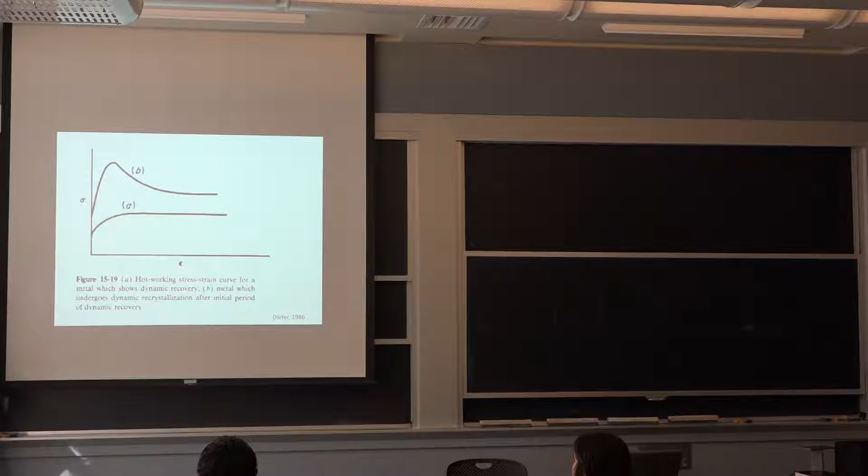And that's what happens on these curves here on stress to deform over the strain applied during a rolling operation. If you're at a certain temperature, you get to this level where there's always some grains that are being deformed, but there are others that are essentially recrystallizing. There's some that are growing, and it's just staying the way it is. We use that a lot when you see the videos I was showing when the steel is red. Essentially, that's what we're doing.

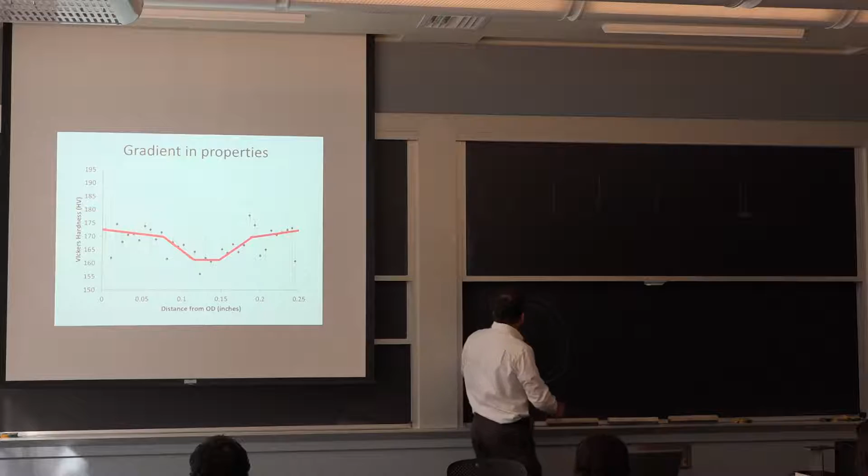Here's the pipe. It's got a certain wall thickness, and the axis here is from 0 to 0.25. That's what we're looking at. So we see that the hardness is higher on the surface. It goes to a minimum in the center, and it goes higher on the other side. So if we don't know anything about what happened, we can essentially hypothesize, say, hey, because it's harder here, as I form, I essentially bend the plate because this pipe came from a flat originally. It just essentially rolled and then seam welded here. So I have my weld in this area.

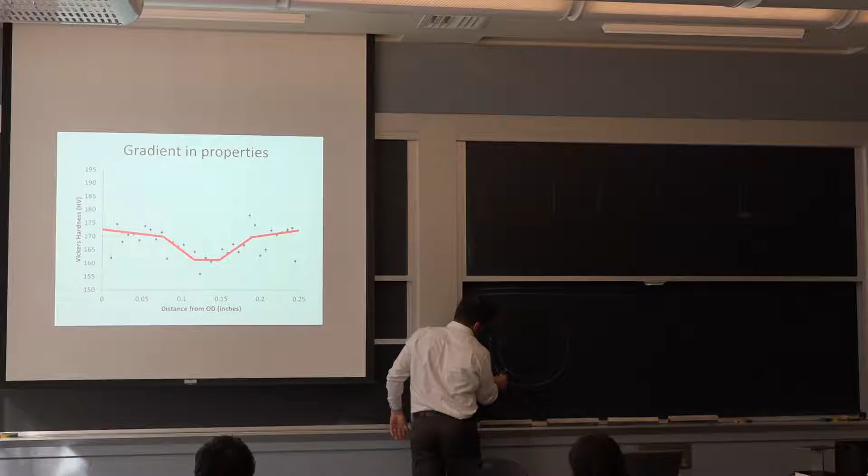And so right now we're not looking at the weld area, but we can see that when I'm forming this, I'm going to be stretching the material on the surface and compressing the material on the inside. Now, it turns out, according to this, that the effect is about symmetrical. So we're bending around the neutral axis. So it's a nice theory. So what we did recently is we tested it using finite element analysis.

So we had this product here. We did a tensile test on it. So we're getting our stress strain curve to break point. We used the part of the data that is before the necking, and that's what we input into this shape, deform it using laws of physics, of plasticity for metals, and here's what we got. So we got essentially the center core, only about 1/5 of the thickness, that remained only in the elastic region. So when you see blue, it means that you're below the yield point. And then everything above is above the yield point.

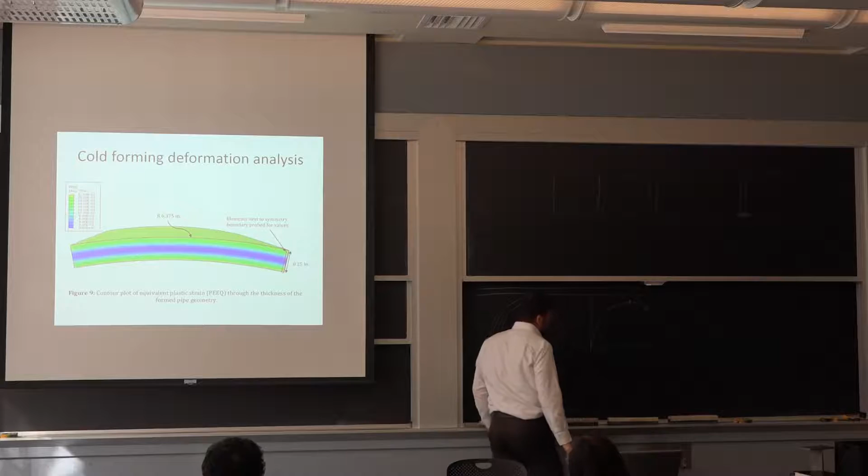If we go to our strain level here, 2.2%. So we only went about this far. So can that explain the hardness profiles? The answer is yes, because even if you only have 2.2% strain, essentially the stress strain curve of the material goes from about 46 KSI here all the way to a little bit above 60 KSI on the surface. Now, it turns out that we did run our test on the surface, and we were getting about 59. But it's a prototype; it's not exact.

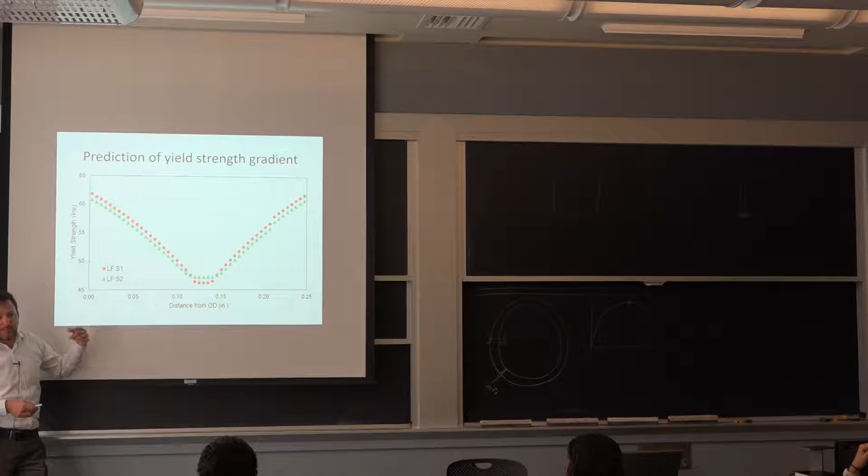So all of this makes sense: if we start with the flat, we get our cold working on the surface, nothing else happened, and the good news for us is we can translate a surface measurement into a mid-wall measurement just by using our finite element analysis, just as a parametric study. We won't do it every single time. We just arrive at a correlation equation and apply it.

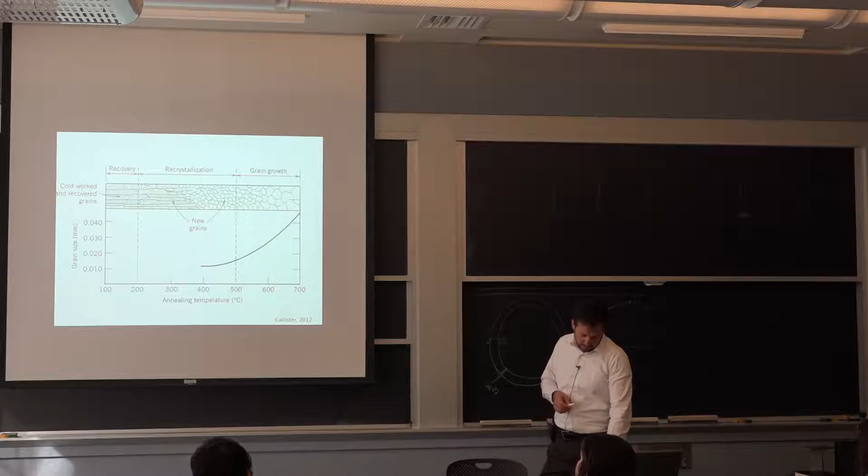Overall, it means it's a lot more difficult to take a surface measurement and go to the core. Because now you don't have just a strain, you have a different microstructure to deal with that's going to have a different hardening behavior and a lot of other characteristics. So these are different stress-strain curves. The other case we had was really the same stress-strain curve. We didn't know at all what we were going into, but when we realized it, we said, well, it's a good thing at least three people took that class.

Yes? Is there going to be a lot of residual stresses? That's a very good question. The residual stresses on this pipe will depend on exactly how you clamp it. If you clamp it and when you weld, you continue pushing, because you have your seam weld here, if you let it loose, it's going to be opening up a little bit. So you start from flat. If you didn't have the weld, you'd have a spring back, right?

So let's just draw it. I'm trying to get the two halves as close together as I can. If I did not have the weld, what's going to happen here is it's going to spring back on me and leave me a little opening. Is that what you were thinking? As you said, when you go from the surface to the middle, the middle is in the elastic region. Yes. So that's going to change, right? Because the plastic region will not go back to the original. Yeah. Okay. Maybe I was misunderstanding. So you're talking about a built-in stress in the product that may also influence the microstructure change.

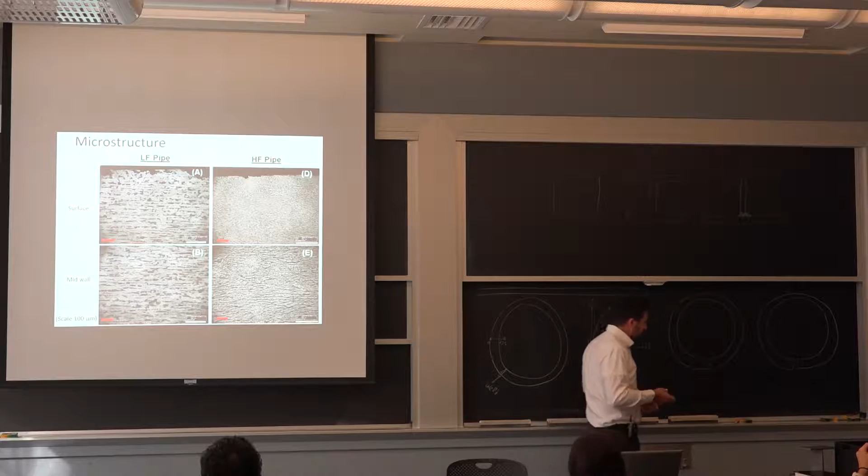It's not as big of a factor for the microstructure. If I stay very long at temperature in my annealing process, I can heal a lot of these residual stresses. We call it a stress relief treatment. Anywhere there were a lot of stresses between the surface and the core, because at temperature my yield strength goes down so much, I can just deform and get rid of a lot of the residual stresses. So that would happen on the second pipe, the one with a different microstructure. If you cut it up, it's going to stay where it was. The pipe that was cold worked and welded, if you cut it up, it's going to open up on you a little bit.

And part of that is because of that stress gradient. So what you're going after is there's a little bit of a tension compression zone in the center. And those are really there and true. But typically, it's not taken into account in steel design. And the reason is, say I have a little bit of a tension here on the surface. I'm almost close to yielding on the surface, which happens if you have a weld, for example. So be it, I will deform.

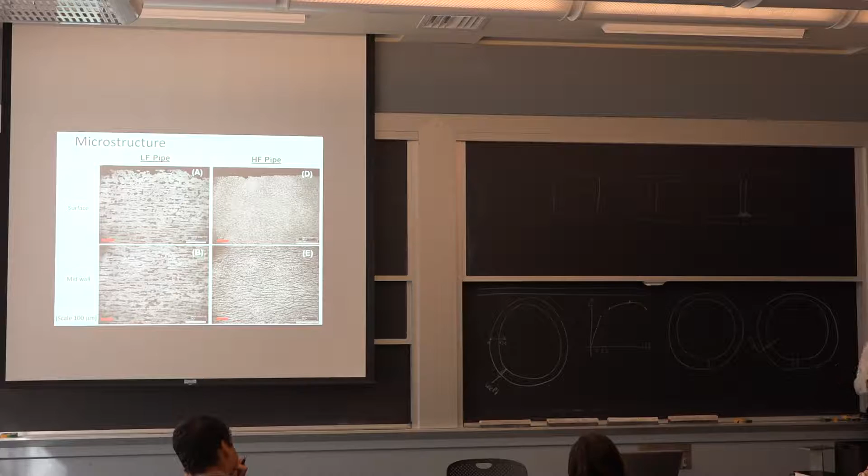We are a lot of times relying on steel being very deformable and not creating a problem in terms of a fracture. So if we had a very brittle material, all these considerations about exactly what the stress level through the thickness would be will matter. But because we're saying if one spot here reaches yield, that's fine, because the overall behavior of the wall is going to remain elastic or approximately elastic, and therefore I don't grow the diameter of the pipe. So people are more concerned about growing the diameter than having one zone reaching some plasticity.

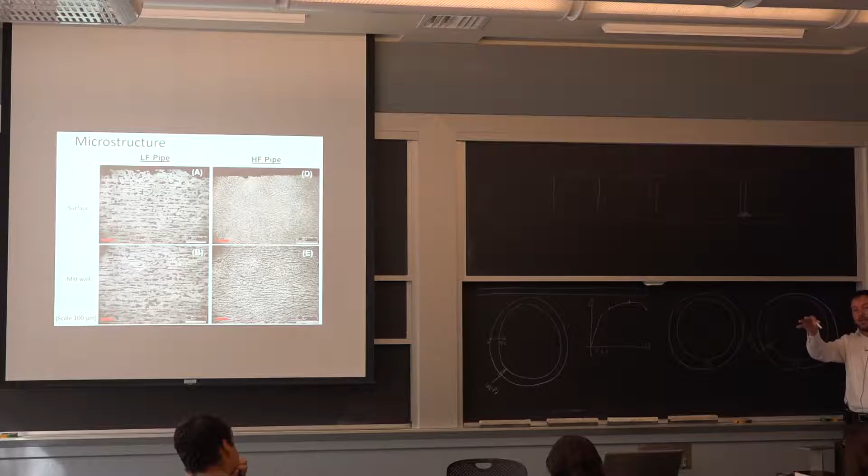It's a good question. Gets me a little bit deeper than I thought. But the stress relieving, by the way, is done on forgings. It's even done if you machine in aerospace. A lot of times they'll machine down a piece of aluminum and they'll do a stress relief before they do the very final machining, just to get rid of all the deformation before the last step. On large parts, it's very important because every piece of wrought product will have some of those gradients in stresses through the wall, especially if they were cold formed. So if you're removing the surface, now all of a sudden it bends on you. It's just part of what it is.

Okay, just going a little bit more into rolling. By the way, this is a reference that I posted on Stellar that goes through all the main deformation processes for metals. So I invite you to scroll through it. I made a nice PDF of that one chapter. I have the entire book. I think that you wouldn't go through it and be all excited, but that one chapter is probably worth a quick read. It talks about friction being very important in forming operations.

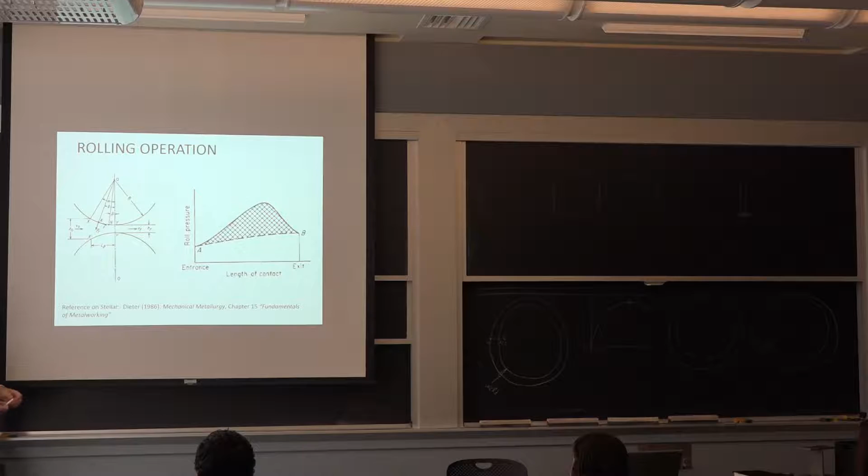In the case of rolling, we use it. We use the friction between the roll and the product to actually drive the metal through. So there's been a lot of study done in terms of, first of all, making sure that you don't stick between the roll and the product, but also that in this process you maintain everything under a compression pressure as opposed to tension, and that is to avoid the problem of cracking during forming. So you want things to be in compression. It's not a problem with rolling. It can be a problem with other processes that we're going to see.

This is just for you to bear in mind that both ways of forming are done. When you do it hot, the good thing is you can deform a lot more. You can change the aspect ratio of the part a lot more. You typically do it at a pretty high temperature that's a function of the melting point of the alloy and at high strain rates.

When we talk about cold working, probably the most used cold working processes are for copper and aluminum, for electrical conductors. With those, you want a relatively pure metal, so you have the maximum conductivity, but you also need it to be strong enough so when you hang the wires, they don't stretch. And it looks easy, but in reality, it's a limiting factor, especially for aluminum. If you have these big conductors between transmission towers, they sag and they do have a lot of tension in them. And therefore, you do want to cold work them for the reason of increasing the yield.

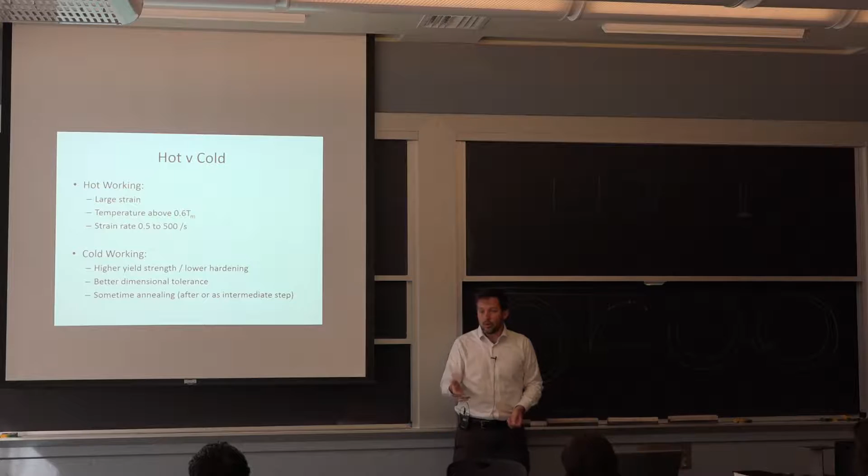In manufactured product, if I want to buy plates to make an assembly that I won't machine, it's nice to buy a cold work product because it has more dimensional accuracy. Now, if you're going to machine, that's the exact opposite, because you know that your cold work product is going to have this skin with a lot of tension or compression in it. There's going to be a very high difference through the thickness.

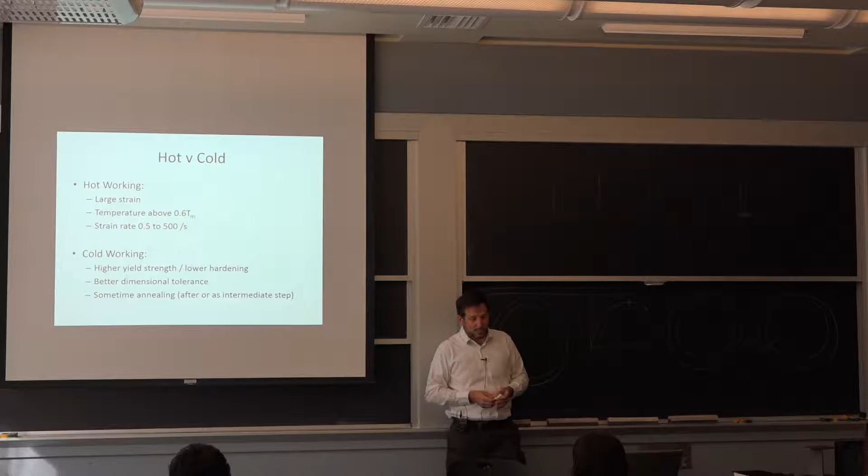Now, to avoid that, you can anneal your cold work product. So you maintain the dimension and you get rid of the residual stresses by stress relieving. So it comes to all about the same, but in a lot of very big industry, there are multiple ways to do this. I'm just trying to go with you quickly why we do it in such a way. So why would we use other processes?

The deep drawing, probably most of you know that's how we make the aluminum cans for Coca-Cola and all that. So you start with a circular blank. And you essentially put it over a hole, and you hold the flanges here, and it deforms and draws the material and stretches it very heavily. So you're looking here at a deformation factor of more than 2 to 3.

What a deep drawing operation requires is a lot of strain hardening, because otherwise you start tearing in one area. It's a little bit like necking in a tensile test, if you don't have a lot of strain hardening. So there are specific aluminum alloys designed to be very, very soft to begin with, and then as they harden, they allow you to deform. Now, there are certain cans that are not done all at once, and that is because you want to stop and soften the material again, and then continue with the same hardening process.

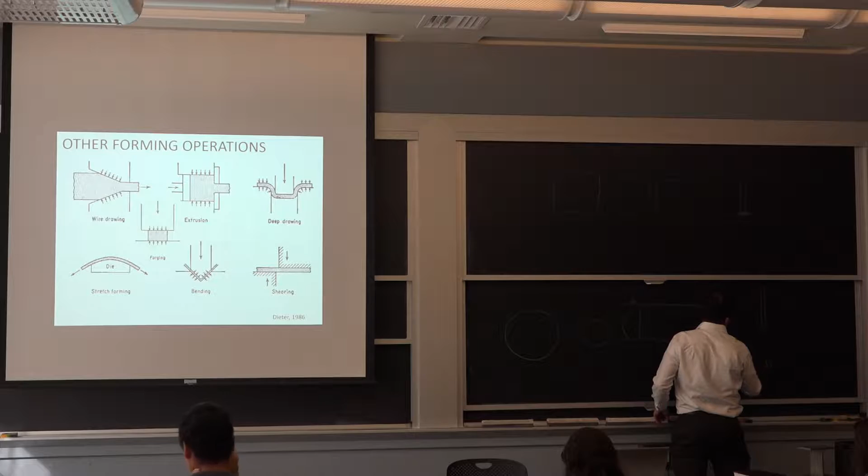Let's say we have a pipe wall. We poke a hole in it. We have the pipe coming in, and we put a weld. That's an option. What this design allows with the forging is I have the same hole, and I have my forging on top of it here, so it looks like this. Then I have the thread. So one main advantage is I can put the pipe later in the field without needing welding. But also, my weld is further from the pipe itself. So it's got a much better moment capacity.

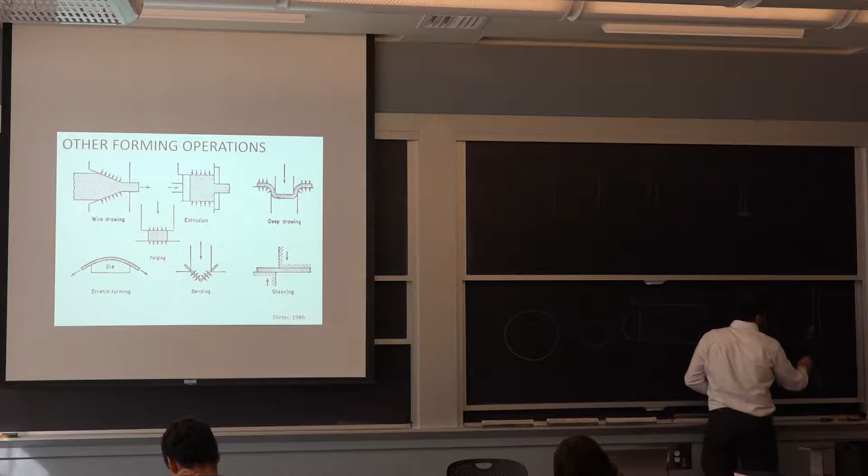The biggest stress riser here is between the forging and the threaded end, as opposed to being right in the weld. So this is going to give you better long-term strength if you have vibration than if you try to connect it directly. And to avoid having breaks at the threads here, that's why we use a forging. We don't want to use a casting or anything like that. And we don't want to weld here.

I've seen on big engines for ships, people come and do repair. Well, this is loose, so I'm just going to weld it. And then it fails because the threaded connection here works in shear, but when you put a weld, the weld is acting transverse in tension and causes fatigue failures. So I've seen that a lot. There's always a reason for doing it different ways. Yes?

It's just because it doesn't have this very fine microstructure that's more resistant in terms of cracking. It has all the segregation, it has the dendrites, and all these features that essentially make it more prone to crack initiation in cyclic loading.

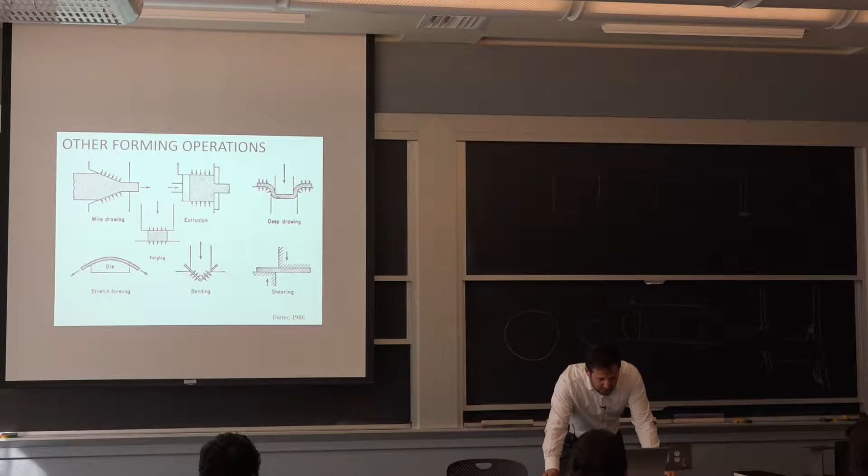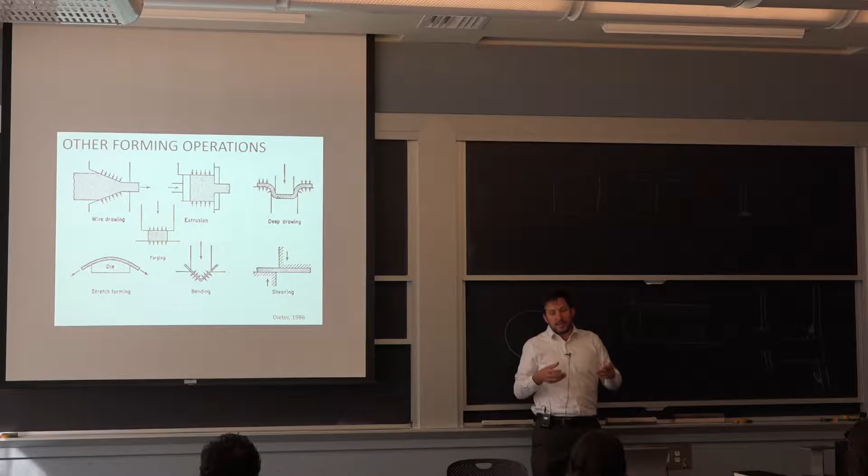So I think extrusion, we all understand it. You need a very good tool that can resist the wearing from all the material coming through it. That's because it's always the same material. On the roll, you have material all around. You have more options for cooling.

Here you need strength. So the idea that you'll put a cooling element in your extrusion device is more complicated. You can, but typically it's a little bit further back. So it's very well suited for plastic and aluminum. It's a lot more difficult to do with steel.

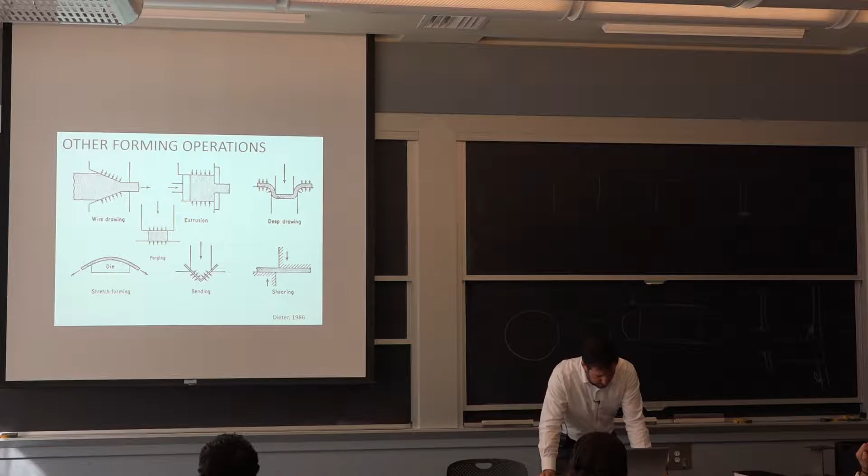What is there? Stretch forming. The main example I have of stretch forming is the aluminum fuselage. And because we already discussed residual stresses through the wall, this is a good way to go here because that's an advantage. If you essentially take the sheet of aluminum for the fuselage and you pull on it in tension all at once and essentially have it adapt to the shape that you're looking for, so you have a form shape and you stretch over it, the really big advantage here is when you let go your tension, it doesn't go into all sorts of different shapes.

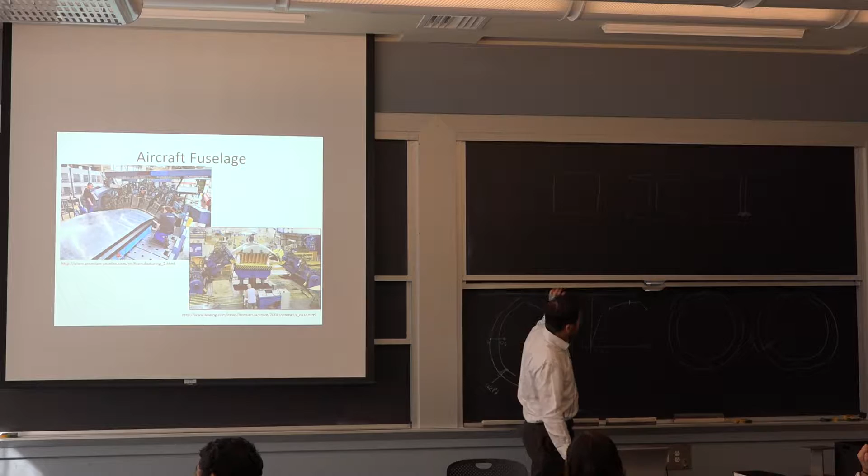It's very different than our pipe example. With our pipe here, we were putting forces this way, so we knew that we were in tension here and compression there, so as soon as we let it go, it's going to go the other way. So this example allows you to have tension everywhere, and that's why they do it. They need a very high dimensional accuracy, but also they are in an industry that is trying to avoid high residual stresses for service.

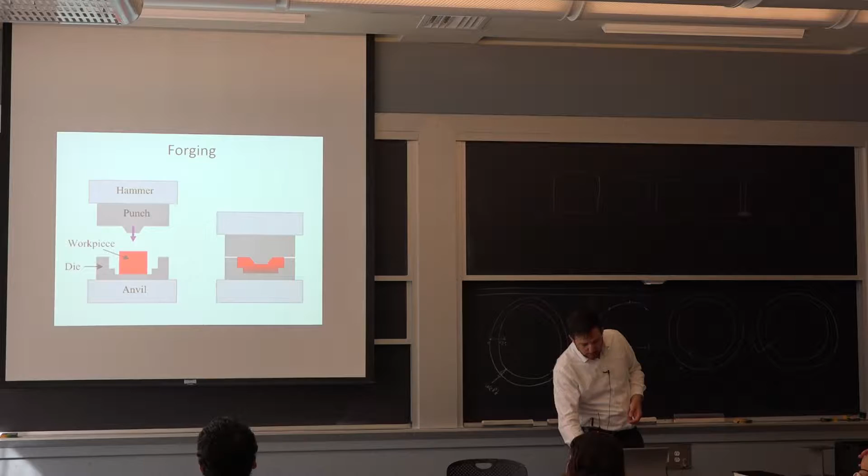The forging, we already went through. The main aspect here is you have these free surfaces, so a lot of times you end up with multiple operations. You can end up trying to push in different directions at the same time, and that's also a very complex operation. These very, very high forces. So we're typically looking into very, very large components or very high volume, like steel wheels for cars. They are forged, but it's because somebody decided to go through the process of making it like a 10-step operation that actually works. Because if you try to do it all at once, I'll say good luck.

Tube forming, you can form a tube without having to take it from a flat and weld it. Now, first thing, we call these seamless pipes. But if we think of, so this is with a seam. If you think of seamless, it doesn't say seam free. Just the same way we have stainless steel as opposed to not staining steel.

So sometimes, and it's part of some of the codes, you can do the same process where you have a plate, you form it, you put a weld in it, but then you go to this drawing operation to essentially homogenize the weld so you can't see it anymore. And that is considered a seamless pipe, even though you did put a seam in it at some point.

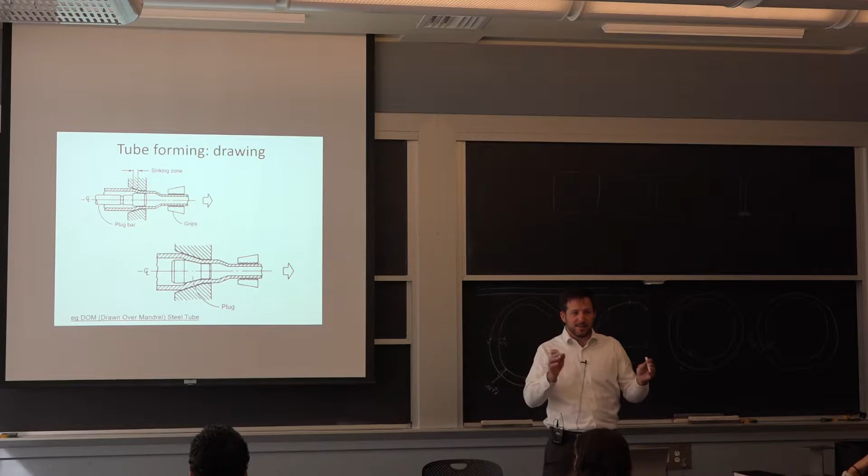So we talked a lot about metal forming, and I want to make a kind of a transition to plastics because I know a lot of you will have projects involving all sorts of composites. So let me just get rid of this. It's something we're going to start now. We're going to finish this on Thursday. The other thing I want to do Thursday is bring in some examples of failure analysis. I think it's a good way to bring some practicality into this.

And maybe there's one thing before we forget, because we spoke Friday about inclusions. And you guys had some good questions about the inclusions. One question that came out is, why do the inclusions stay in the middle?

Let me push this over. I can do that. Nope.

All right. We talked about the inclusions that were the product of segregation. So we have the entire billet. We start forming our dendrites on the surface, and when we get to the center is where we have more alloying elements and more impurities. One thing we discussed is, as we go through a process of making this into a very tiny wire, these types of inclusions are not part of the material crystals, so they don't diffuse.

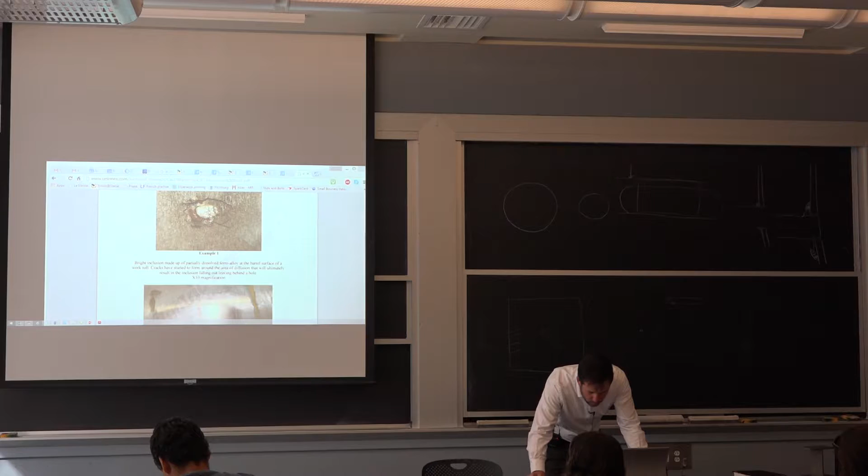So, plastics. Just the same way I started talking to you about casting, I said, castings, we use them for these ductile iron pipes for water distribution. Well, plastics now, we use them everywhere, right? A lot of times, they're not the most critical components. So this is a good example. The legs, they're steel, welded together. It's a nice welded tube. I don't think they've been really drawn.

These are probably seam welded tubes. And then, actually this is a little surprising. I guess they assume that I won't rest on this for hours and hours, because if I did, it may deform eventually and become weak. It doesn't say on it, don't lie down the whole night, but it will deform it permanently.

Pipes is a big application, and for smaller diameter natural gas lines, for the past 30 years or so, we've been using a lot of HDPE, high density polyethylene, for a number of reasons. Cost, not only the material, but also the way to lay it down in the ground. It comes in big rolls, not this one, but a much bigger roll. And then they have essentially a fusion welding process to put the different pieces together.

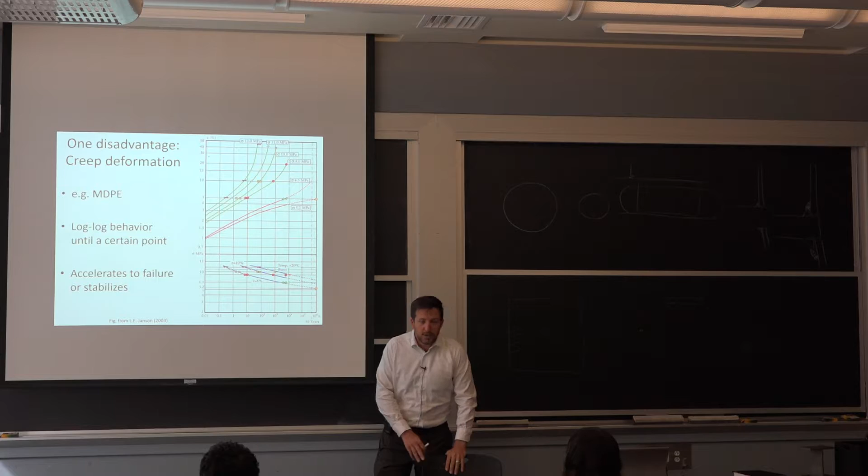So again, the biggest concern really with using a plastic is that if it's for a sustained load, a load that you put on and it stays there, it will deform over time. And the deformation, we're looking at polyethylene here, happens on a logarithmic scale. So you get a little bit at the beginning. So say here, this is after a day. So after a day at a given load, what do we have? 5 megapascal, we got 3% strain. So that may be applicable to something like this here. And that's fine. I can do that, get a viscoelastic strain.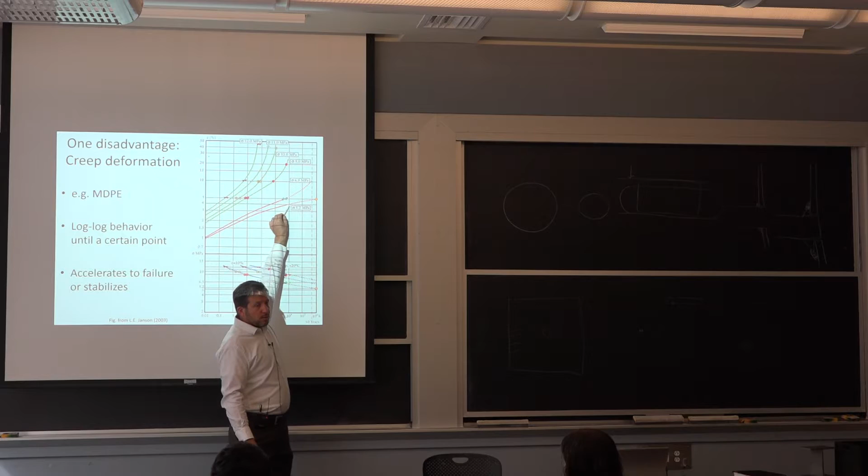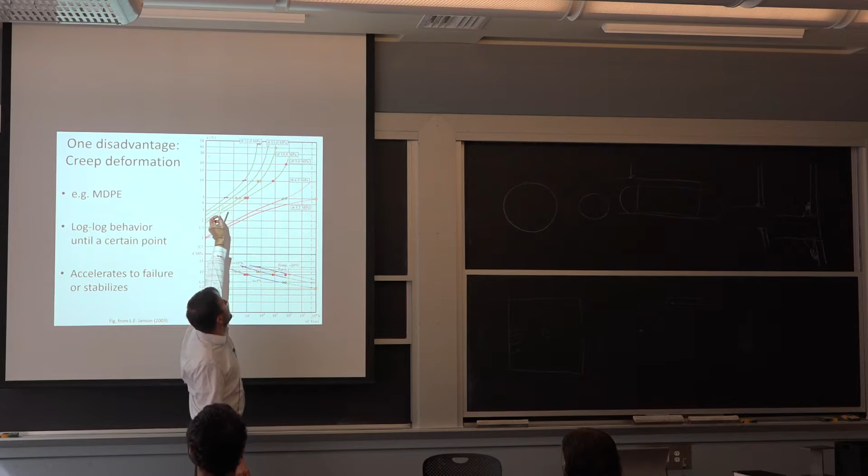So the problem is if I keep going and I'm looking at a pipeline that needs to be designed for, say, a 50-year life, eventually I can literally break in a very sudden way. So there are two things that happen as the plastic deforms. One, it becomes longer. That's just the flow. But there are also these microvoids that will form in it and can lead to more brittle fractures. So the brittle fracture happened here at a lower stress level. And when you were at a higher stress level, the green curve, so 10 plus megapascal, you're soft enough that you keep deforming and deforming. So you're almost forming it into something else without breaking it.

So because you have these two different behaviors, we won't go into the details of that, when people talk about time temperature equivalence. There is something to be said with the polymer that if you give it more time to deform, that may be the equivalent of more stress. That's a little bit what the principle says. But that is so long as your acceleration factor by putting more stress doesn't change your failure mode. And in this case, it does.

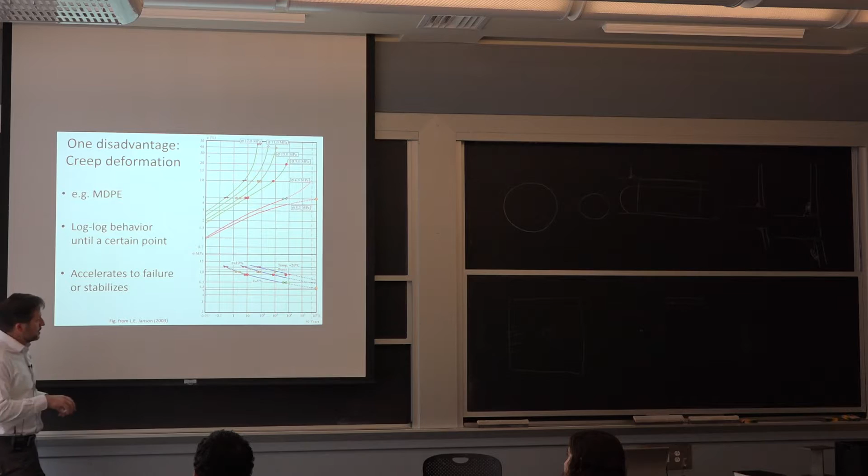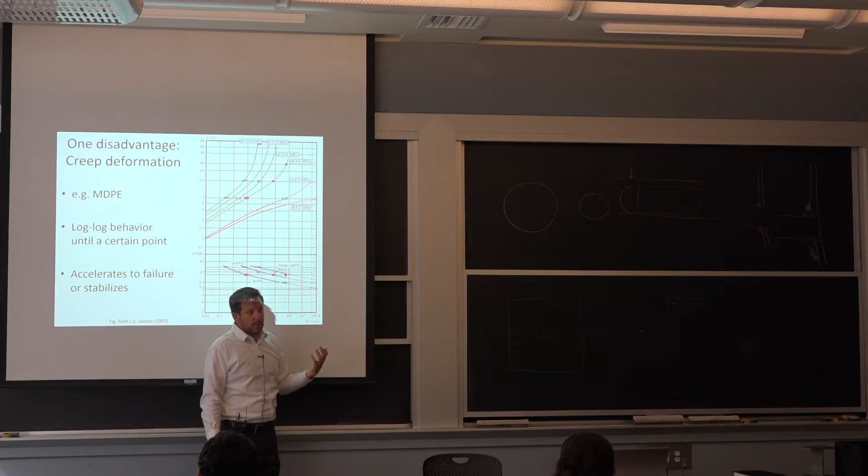So the consequence of this is if I want to put a polyethylene pipe in service, the minimum qualification test, if I make some very small changes, I already know very much what the material is, I make just a small change, I need to go to 10,000 hours on my test. So it's about 14 months, and it puts us right here. I didn't make it that way, but it works with this curve that you essentially are accelerating. It's not 50 years, but it's long enough that you are generating the failure mode that's the problem one. Just getting the pipe a little bigger, not a big problem. But if you do start forming small cracks in it, that leads to a catastrophic failure. So there is an option of accelerating the test, but it has a lot of consequences.

What it means a lot of time with a plastic is you either assume it's going to be very low load. So for an under the hood component, like the protector for the car cooling system or anything like that, you say, okay, it should stay in place. If it sags, well, maybe it rests against something else and that won't be too bad. So there are a lot of protective measures, so it's not as consequential if it fails. Like this chair, if I leave it in my office and I come back and there's a big V shape in it, then I won't use it. It's pretty obvious, right? But if it's underground and it was under pressure, I'm hoping that it only grew a little bit as opposed to developing these small cracks. So there's a.

I was talking a little bit about the advantage. It's less expensive, and then we didn't talk about it, but it doesn't really corrode in a common sense. It does have its own issues with the environment in terms of cracking resistance, but it has a lot of advantages. But then there's this component that we never have to worry about with steel that now we do: how it's going to change over time at ambient temperature.

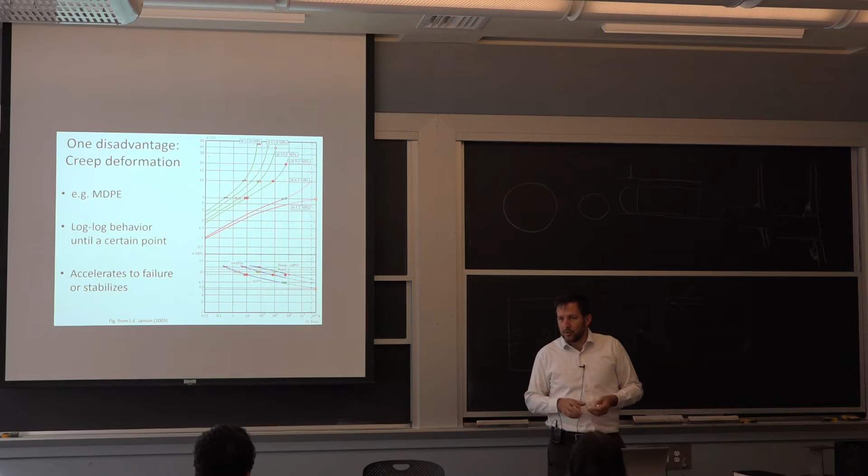Now, why does it do this? And this is going to lead us to talk about forming next time. The polymers have this macromolecular structure, very, very long chains. And you're all familiar with it; if I pull on it, let's do that here. So if I have a constant force over time, I'm looking at the deformation. So I just put a dead weight, so I get a certain elastic response at first as I'm loading. So here I reach my sigma.

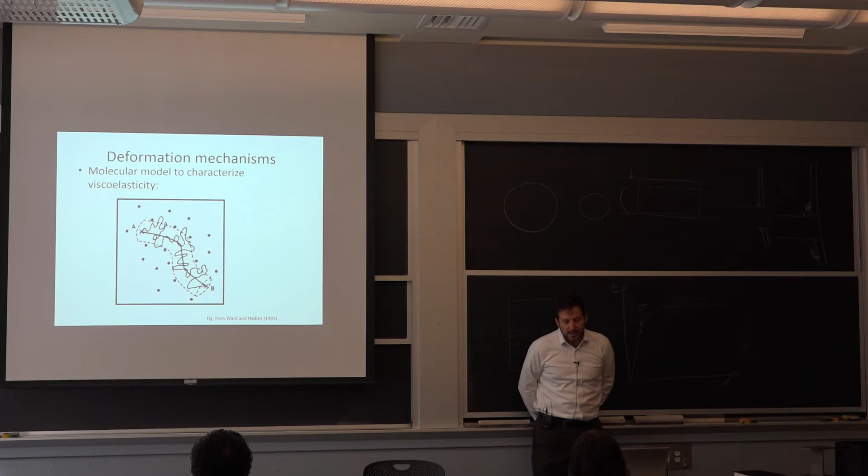And then it keeps deforming and deforming and deforming. Now, if I'm looking at it on a linear plot, I may think, well, nothing's happening anymore. But when you plot this on a log scale is where you still see that it will be going up in deformation. So what exactly is happening in the material? You can differentiate it in three main ways, and that's what at least helped me. We'll see if it helps you.

One is just really an elastic deformation, just movement of the macromolecule. You never change the bond-to-bond distance in this case, because the carbon-to-carbon bonds are just so strong, they don't change. So the first thing is you kind of move them, and you're essentially moving the van der Waals forces between the different chains. That's how you get your elastic constant.

The second step here, what I call the viscoelastic, is now the chain wants to move a little bit more, and you have these side groups. So you have the carbon-carbon chain, and you have side groups. They start rotating, and that takes time. It takes time to rotate and allow for some movement. And that's the viscoelastic part of it, because you can revert it. I went past an obstacle, so I move my side group. If the load comes back, I can do the other way around.

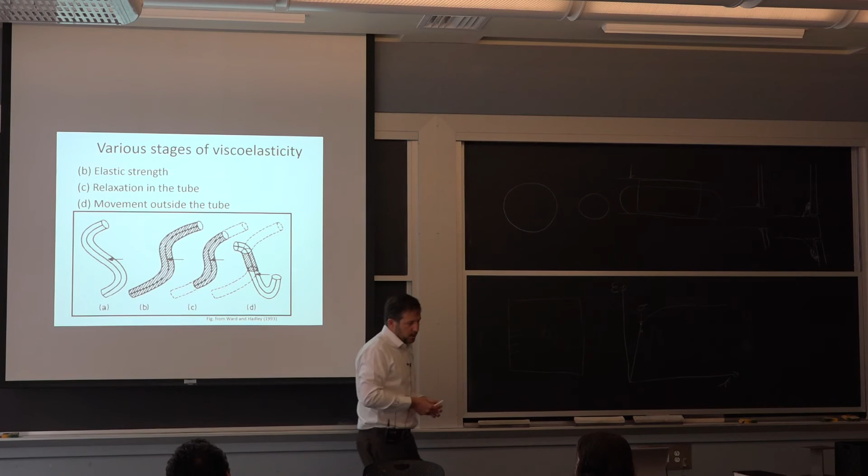Nothing has really changed. The last step, which is really a viscoplastic process, is now the chain really starts to move completely on its own. It starts to flow relative to the other chains. And that's a part of the history of deformation that typically does not get recovered. They all happen at once. But at first, you see this one. That's the pretty obvious one. Then you start seeing this, and when you're done doing these small movements is where you start really having the chain displacement. So you'll see exactly how it comes in when we talk a little bit more in detail about creep.

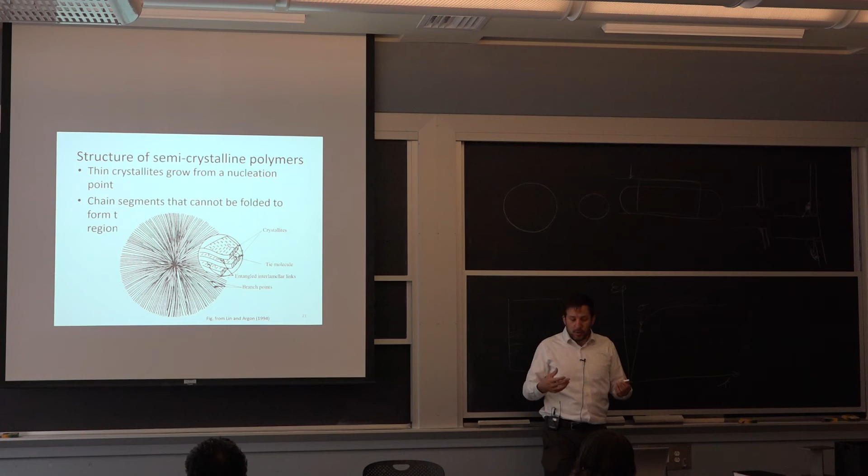Just to add a little bit to our story here for the deformation, we're dealing with a multi-component system. So there's some amorphous zone and there's the crystal zones. A lot of times most of the stretch that we get from creep is in the amorphous zone. So one reason we can use polyethylene is because it has crystals in it. If it wasn't for the crystallinity in polyethylene, it'd be so soft that you couldn't use it as a structural material.

This is probably a good starting point when we're going to talk more details about forming. So if we cast the polymer and got these spherulites that we talked about 2-3 lectures ago, and now we start deforming them, they'll break down and the crystals orient themselves in the direction of pulling. So now all of a sudden you transition from having mostly the amorphous zone inside the spherulite stretching to essentially having all the crystallites lined up to make a cord.

So if you have a nylon cord or a polyethylene cord, you're looking at a strength that is about 5 times what you got out of molding, because now everything is well oriented and everything is also more resistant to creep. So you wouldn't use a nylon rod if it was injection molded. It will literally creep on you a lot.

But after you've gone through all this drawing process, you get to a point where there's so much hardening, so much orientation that now you are also more resistant to creep. So that's probably the biggest advantage of being able to draw and have ropes that will resist 1,000-pound capacity over an extended period of time.

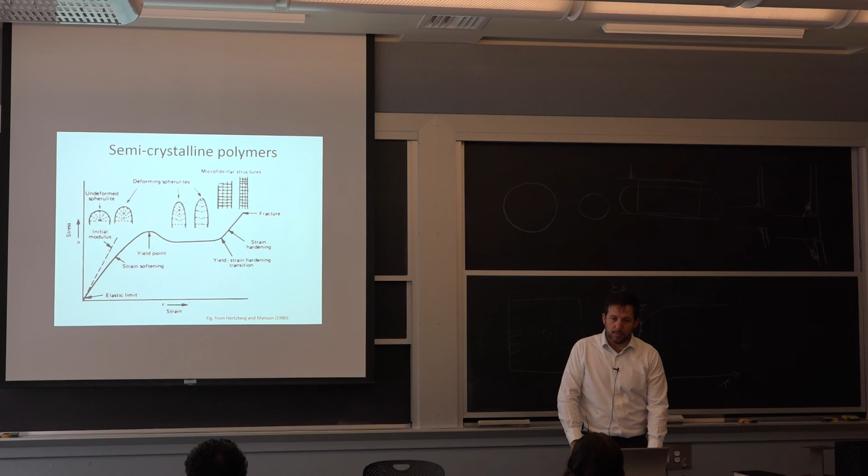So we'll take that topic up and start talking about more details on injection molding and composites that you can do with polymers. That would be Thursday. Thank you.